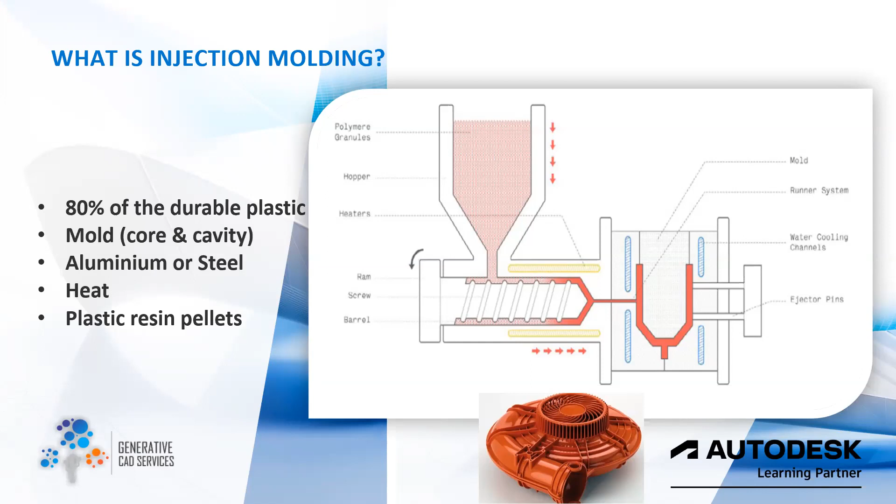The engineers here also know that all of these have their pros and cons, all right? And it has to do a lot with heat and pressures and all this stuff. And of course, for the raw material, we often have varieties of plastics, but they come in resin pellets. So aside from that, it's also very important to mention that there are other plastic forming processes, right? And these all vary depending on the process. So there are a whole couple of them available out there.

But often when you're considering plastic choices or a manufacturing process for plastic, certain things come into consideration, all right? The form, the complexities, the intended volume, and associated cost, of course, production lead time and material. So, given all of this combination, it's always very, very desirable to go for the best fit.

So it doesn't really mean that injection molding is the perfect outlet, but it tends to have the best combination, the best feature fit that favors manufacturing, especially when you're combining volume against cost. So this is something that makes this most desirable. Of course, I've mentioned its share in the market, or its share of the manufacturing process tends to be the best or the most widely used in the industry.

But for me, before we go ahead, people often ask why injection molding. Of course, working at Autodesk, this is partly one of the conversations we often have with people. Why not? Some people even go to the extent of asking why not 3D printing. So depending on the features or the benefits, it's quite important to go for a particular desirable feature. So for injection molding, it's quite favorable. It makes more financial sense when you're going for high volume, when you're mass producing some plastic.

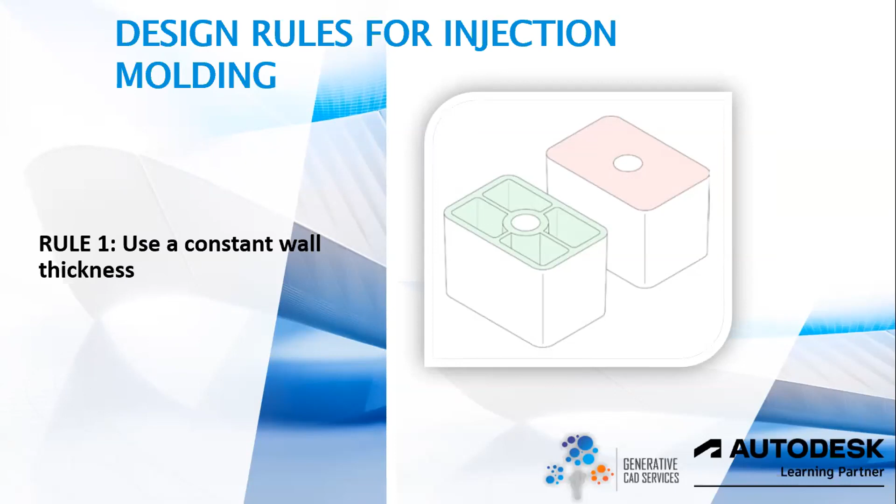And as the time increases, instead of manufacturing 1,000, you're probably going to manufacture 500, and that's a cost on the production. And then you probably literally don't have any use for it. So it's something that I really wanted to cover here.

So the rule is always to keep the edges round, so add fillets, both internal and external. At the same time, the internal edges should be around 0.5 times the wall thickness. So that's the radius for internal edges. And for external edges, you want to look at the internal fillets and the wall thickness.

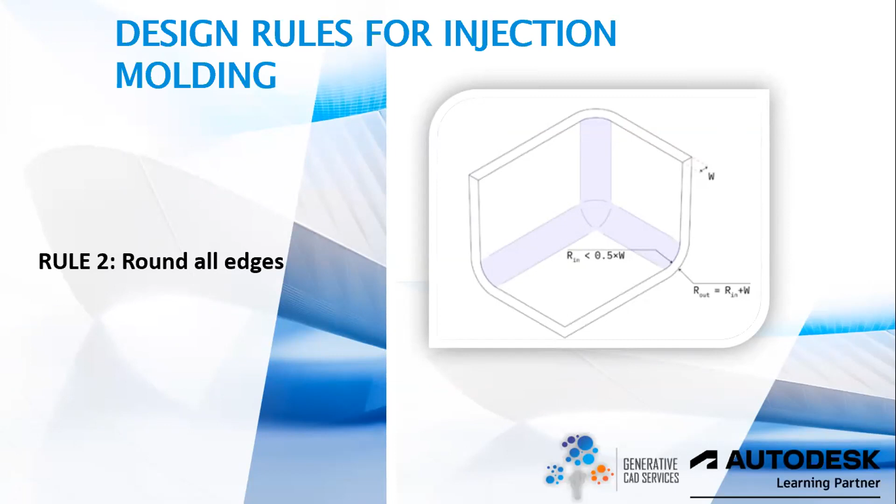So it's always important that you keep the wall thickness constant, just as the edges are also constant, like the fillet and all that. So it should be the same thickness as every other wall part of it. This is something quite important. It's very, very important to note.

And then the third rule is always remember to add draft angles. The recommended minimum draft angle is 2 degrees. So you could make it 2 degrees or 3 or 4, as the case may be. Always add draft angles and don't add less than 2 degrees. It's something quite important.

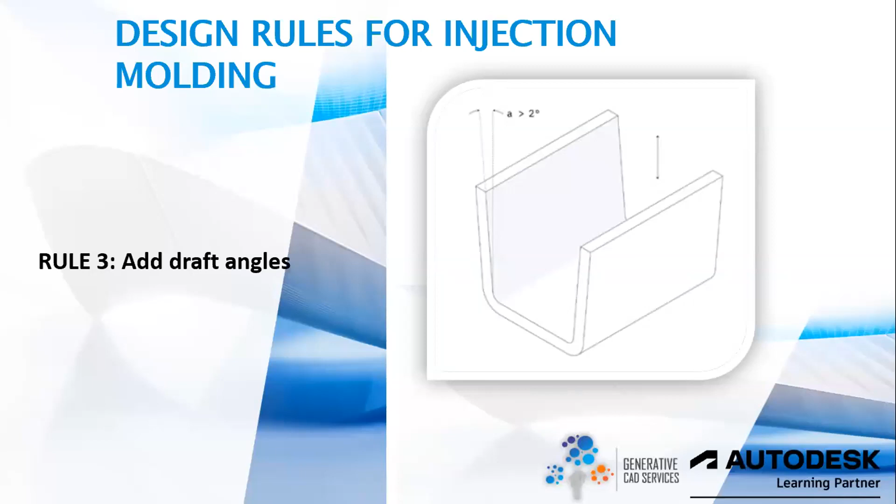Otherwise you probably will have issues during the injection when you inject the plastics and then refill again. If you don't have draft angles, it's actually a problem, which leaves drag marks on the body. So it's always very important to have draft angles, at least minimum 2 degrees. So the next one will be undercuts.

This is a very, very important aspect to consider while designing parts for injection molding. Undercuts in injection molding are part features that are hard to manufacture. The most simple molds come in 2 parts. But when you have an undercut, it becomes more difficult to manufacture with a simple 2-part mold, because material is in the way while the mold opens after injection. So it's always an issue.

One of the things that can cause an undercut is the teeth of a thread, or the hook on a snap fit. These are examples of undercuts, so you can just take note of that. And then how to deal with undercuts: moving the parting line.

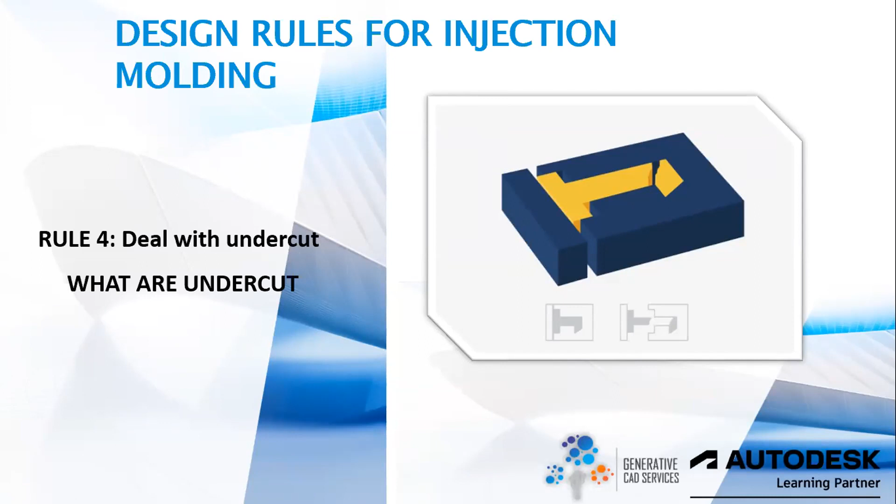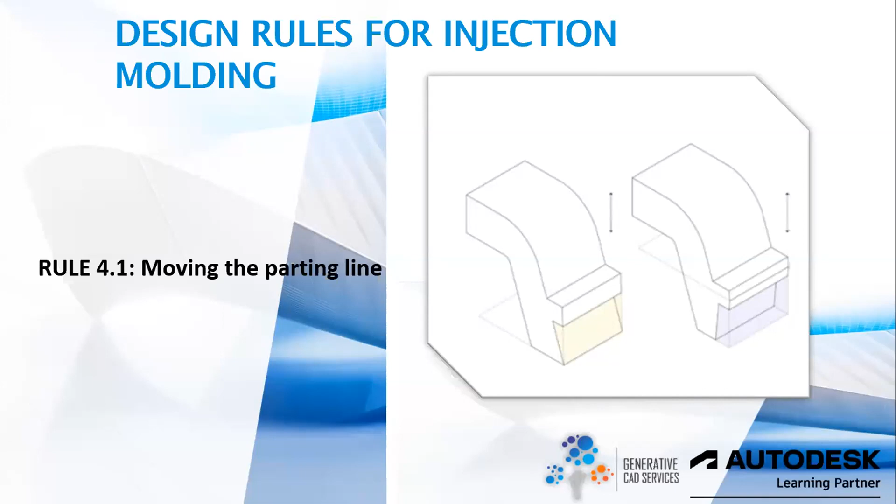One easy way to deal with an undercut, if it works for that product, is to move the parting line of the mold to intersect with that particular part of the undercut. This solution is suitable for many designs with undercuts on external surfaces. Remember, you have to adjust the draft angles accordingly.

The next way to deal with undercuts is using a shutoff. A shutoff removes material from under or above the problematic area. This way the undercut is eliminated, as the whole part can be directly supported by the mold. Shutoffs are a useful trick to deal with undercuts on internal regions of the part for snap fits, or on the sides of parts for holes and handles.

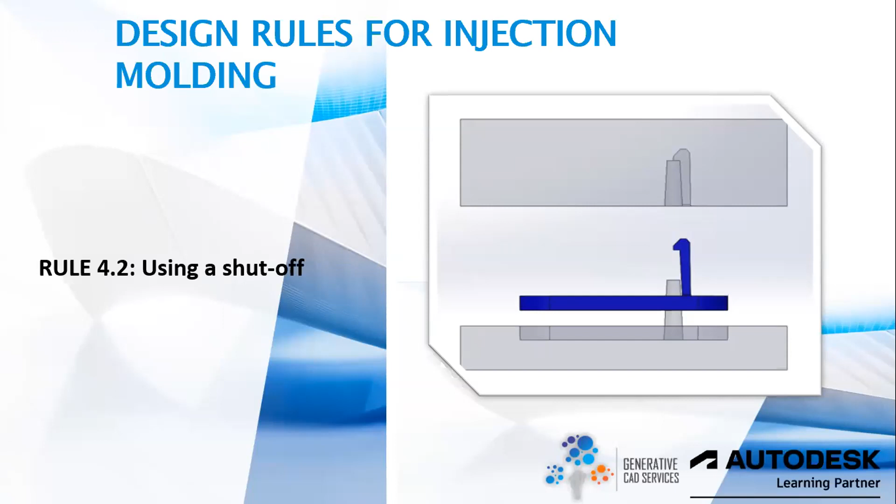The third way we can deal with undercuts is side action cores. This makes for more complex plastic products.

So because of this, we advise that you use this when the two above solutions are not viable or don't give you what you want. Side action cores can be used that slide out of the part from the side before it is ejected. Side action cores should be used sparingly, as they add complexity and increase the overall cost of the mold.

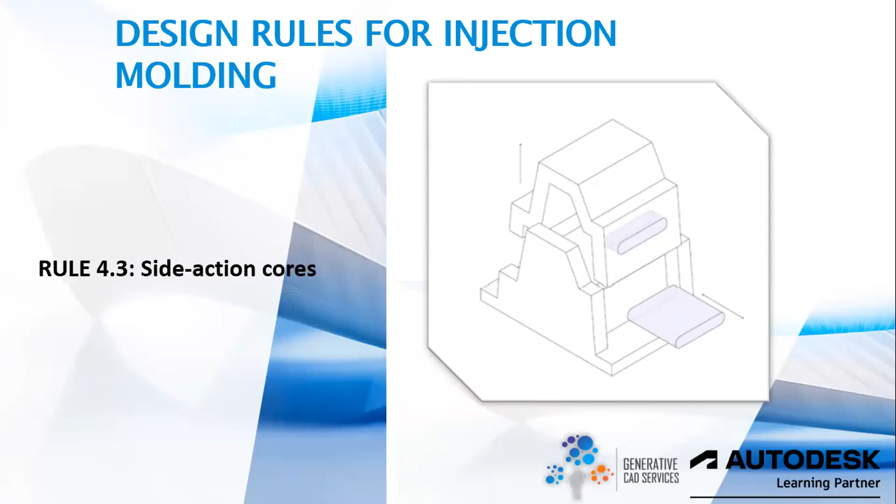It can increase the overall cost of the mold by 15 to 30%, so be mindful that you don't just use it first. You want to explore other options to deal with the undercut before you use side action cores. Next, we'll talk about designing injection molding features.

There are very important features for injection molding that you can always leverage. Like we mentioned, when a wall is more than 3 mm, instead of increasing the thickness, you want to make it hollow and use ribs to hold it. When the maximum recommended thickness is not enough to meet the functional requirement of a part, you can use ribs to improve the stiffness.

When designing ribs, use a thickness equal to 0.5 times the main wall thickness. Then define a height smaller than 3 times the thickness, so it doesn't get tricky. And use a rib base fillet with a radius greater than 1/4 of the rib thickness.

These are some observations, and you also want to add draft angles of at least 0.25 to 0.5 degrees to those ribs. These are some of the things you need to consider. You really need to use ribs, especially when the wall thickness gets more than 3 mm.

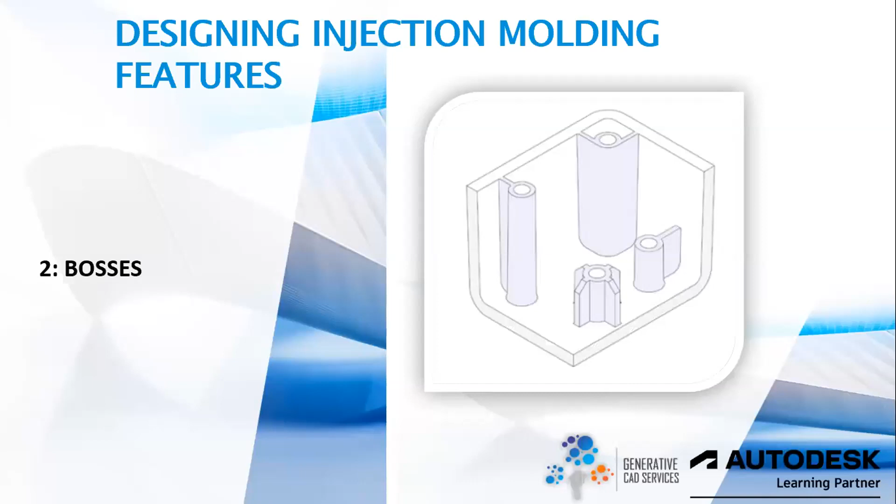The next feature in injection molding is bosses. Bosses are used as points of attachment or fastening in conjunction with self-tapping screws or threaded inserts. Bosses are like circular holes. You can see in the picture they're most times at the edges, or at places where components need to rest, where you use screws. Bosses are like circular ribs, so the same general design guidelines for ribs also apply to bosses.

Next is snap fits. Snap fits are an economical and rapid way of joining two parts without using screws, fasteners and tools. In injection molding, you have to add a draft to the side walls of the snap fit. It's very important, and using a thickness of 0.5 times the wall thickness is also quite important. Adjust the width and length to control the deflection and force. These are things to consider when adding features like snap fits to your plastic products.

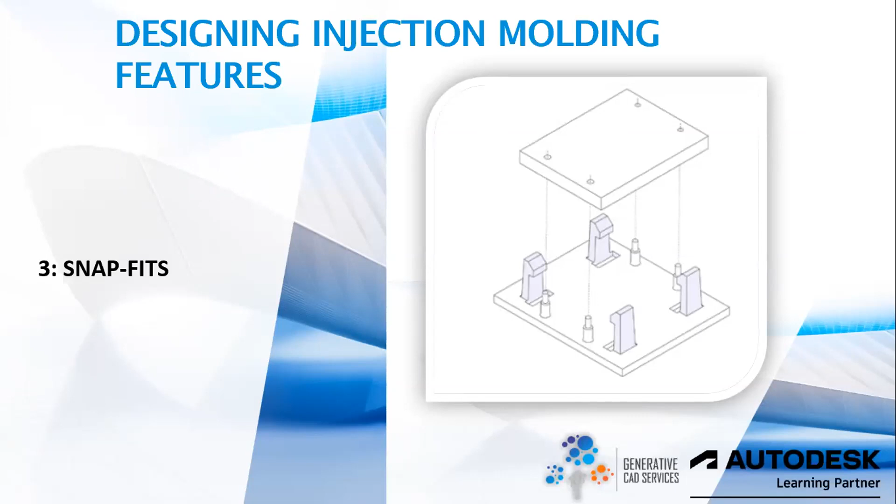Next is lettering and symbols. Most plastics you find have text written on them. Plastic injection molding is great, unlike 3D printing, but it also has rules to get the best results. Text, logos and other symbols can be engraved or embossed on the surface of injection molded parts.

Here are some tips. When adding text, if possible, it is recommended that you use embossing instead of engraving. Align the text perpendicular to the parting line. Use a depth if engraving, or height if embossing, that is greater than 0.5 mm for the text to be clear and not have issues. Use a font with uniform letter thickness all around, and a font size of at least 20.

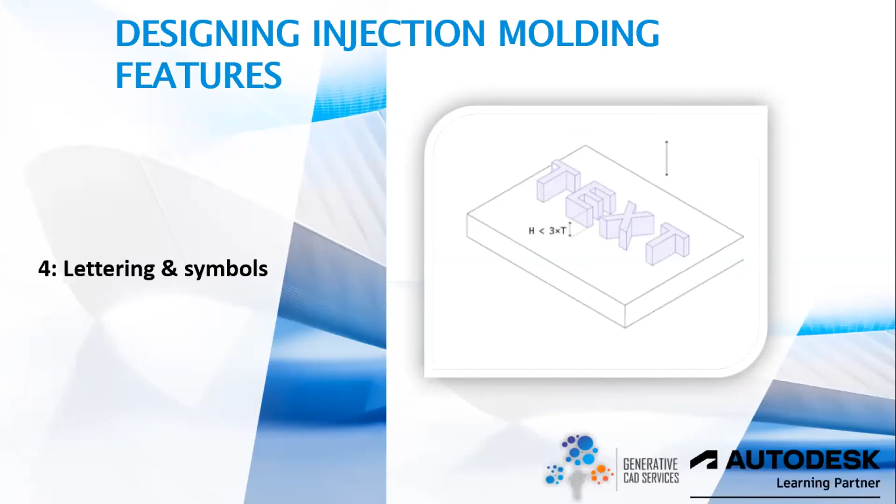So what I just concluded now leads to the part of the case study where we can see how some of these tools and some of these things are applied, and how Fusion really helps us to get this thing done, and gives us further insight and an amazing workflow to solve some of these issues when they arise before sending to the manufacturer. Okay. So, yeah. Okay, thank you so much, Felix.

That's quite an insight, and just to add to what Felix has said, these features, these considerations are quite important for the safety, for the quality and cost of your product. So if you're complying with the required thickness, the required... and of course, if you're preventing undercuts, right?

What people don't often understand is that designing shouldn't be as isolated from manufacturing, because when you keep adding undercuts into your parts, the best solution the manufacturers might be inclined to would be to include mold inserts, and of course that is more money.

So just to continue, Obiora will now give us an actual case study with Fusion 360. He's going to demonstrate how this works, simulating for injection molding. So at the back of our mind, we'll start asking questions like, will the part have sink marks, or are we going to have weld lines that will be detrimental to the aesthetics of the product? Are we going to have problems with excessive warpage? All of these are the questions that this will solve. So please, Obiora, you can share your screen and take us through this demonstration.

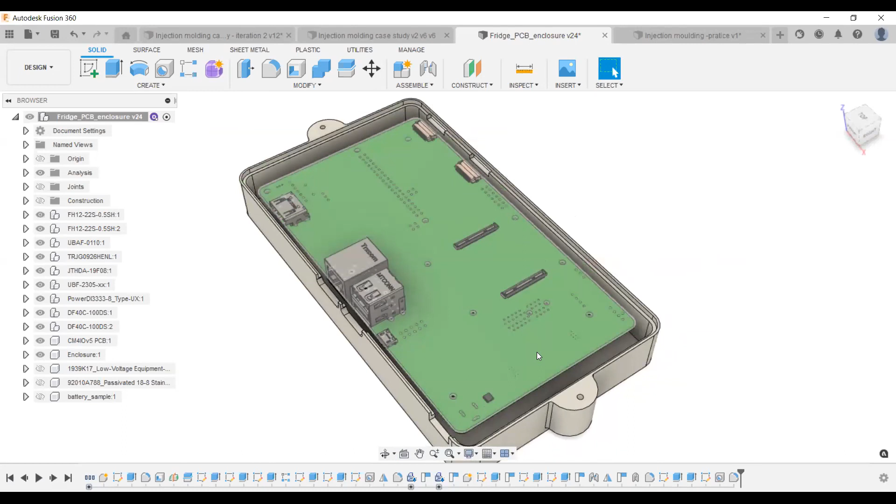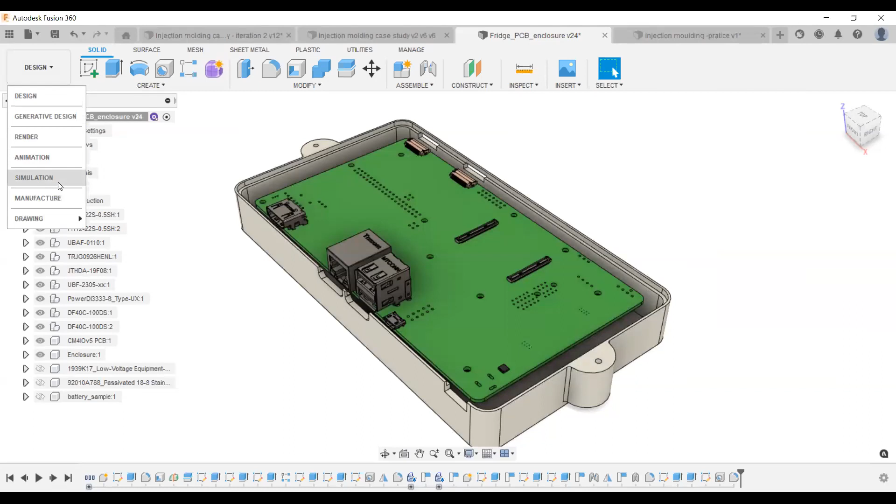But after designing this for 3D printing, you then want to move on to injection molding. One advice I will give is, while designing for 3D printing, you should be thinking at the back of your mind about injection molding. So you should add things like draft angle even in your 3D printed parts, so that you don't start from scratch when you want to go into making tens of thousands of these parts. You should keep to constant wall thickness, even if you are dealing with 3D print. So I'll just jump right into the simulation and show you what happened when we ran the same parts, which were made for 3D printing, for injection molding.

And so say you have an engineer that is well versed in 3D printing and has very fair knowledge of how parts are designed for injection molding. You can just come into the tool, do a few setups, and he has his result right on his screen. And I'll just jump into the results. And don't worry, we are going to be looking at how to do this setup if we have enough time at the end.

And so when I put each of the criteria, Fusion 360 allows you to do things like put the materials. So let me just get out of the result. So first of all, you select the body, you put the type of material you want. There are a whole bunch of materials inside Fusion 360, and probably all the materials you need for injection molding. You set the injection location. You tell Fusion which of the faces is regarded as an aesthetic face, and usually the outer faces are aesthetic faces, and you can see it highlighted in green, right? And so you tell Fusion all of that.

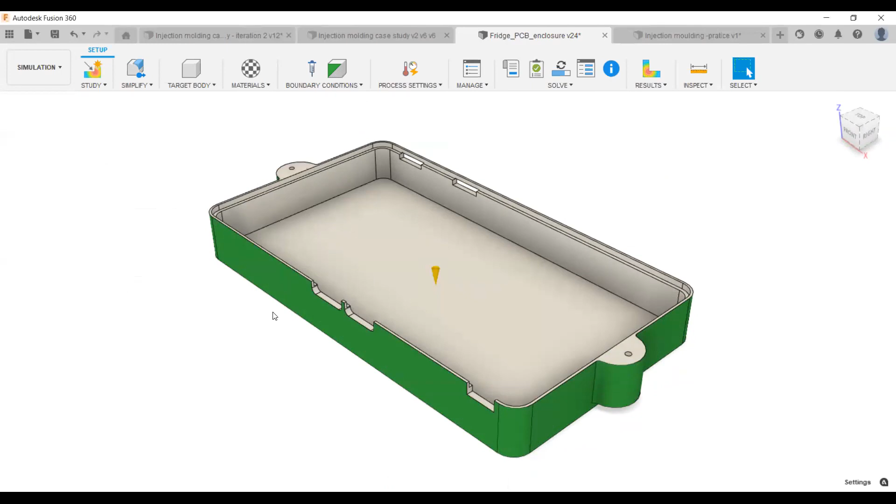And if we jump into the results, so let me jump into the results right now. So after setting all of this, you then send it into the cloud, and Fusion gets back to you. You can see the first information Fusion is giving us. It's telling us that the time to fill will be about 1.72 seconds. It's also saying that with this setting, your part may be difficult to fill with a time to fill of 1.72 seconds. So just 99% of the part is going to be filled up. So we are going to be having issues in some certain areas of this particular part, and I'm going to be showing you that in a bit.

Fusion is also telling us that on 4 faces on our model we have sink marks, and on 10 faces we have weld lines. 4 of these faces are going to be aesthetic faces, and this is actually bad. We don't want to see sink marks on aesthetic faces, and it's also letting us know that our maximum deflection is 0.87 mm, and the total time for this part to come out of the machine is about 17 seconds. We all know how important that is. The lower time your part spends on the injection molding machine, the less you have to pay the manufacturers, right?

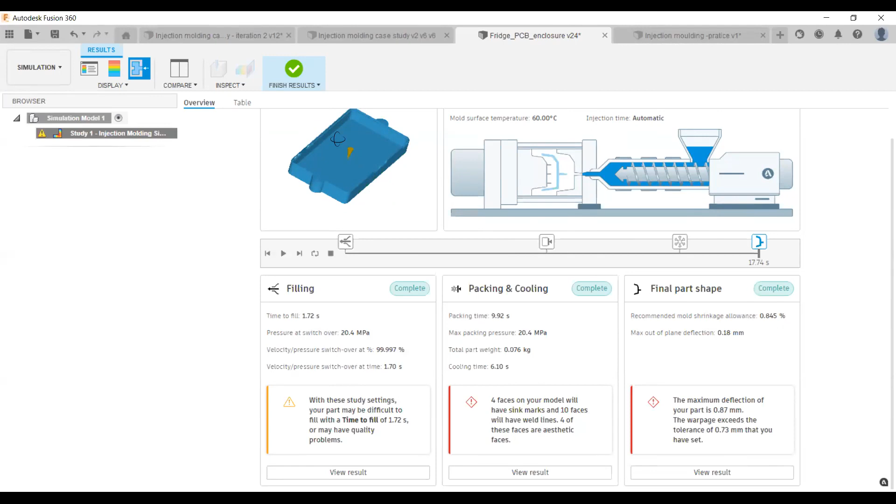And so we're expecting this kind of error because we designed for 3D printing. And then just very early on in the process, we wanted to check what the defects in this part are before we start to redesign for injection molding, although the best workflow would be to always think of injection molding while you are designing for 3D printing. So I'm going out of here and jumping into what happens when we want to design for injection molding. So just give my laptop some minutes. Yep. So we have that.

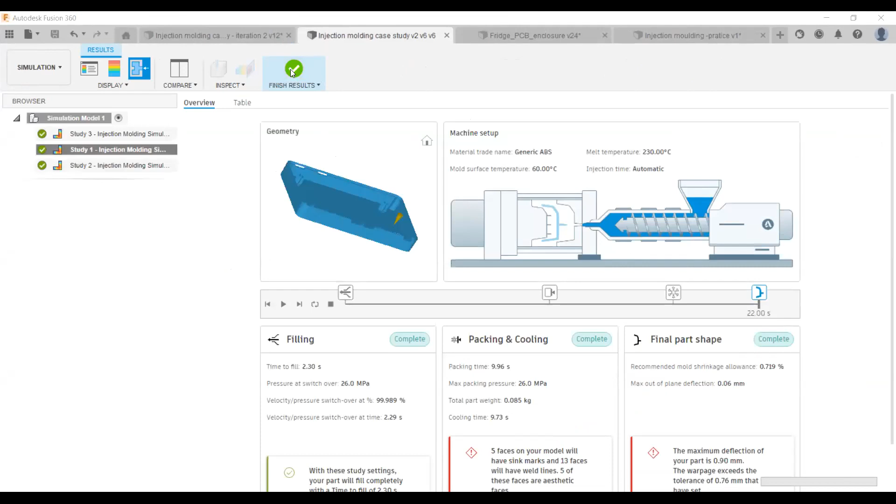So let me just show you some of the features that we incorporated into this part to ensure that it comes out well. So first of all, let me slice this model. If you look at it, there is a draft angle of about 1.5, which is quite recommended for ABS, right? You need to put at least a draft angle, even if it's 0.5. Draft angles help your part to come out of the machine, so you need to put some sort of draft angle so that your part can easily get out of the machine, right?

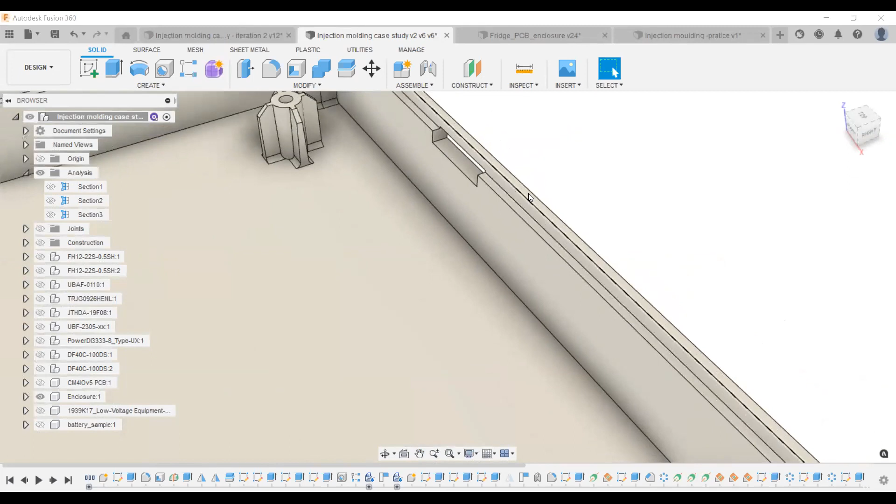So if I go out of here and check, the wall thickness is also quite uniform, right? If I try to measure it, although due to the draft angle it might not be accurate, if I check this face and this face, the wall thickness is about 3 mm. It's because of the draft angle that it's saying 2.998, right? So you want the wall thickness to be quite uniform. And for ABS plastic, you want to stick to 3 mm or just 3 point something mm as the maximum wall thickness, right? So ABS plastic is the material for this product.

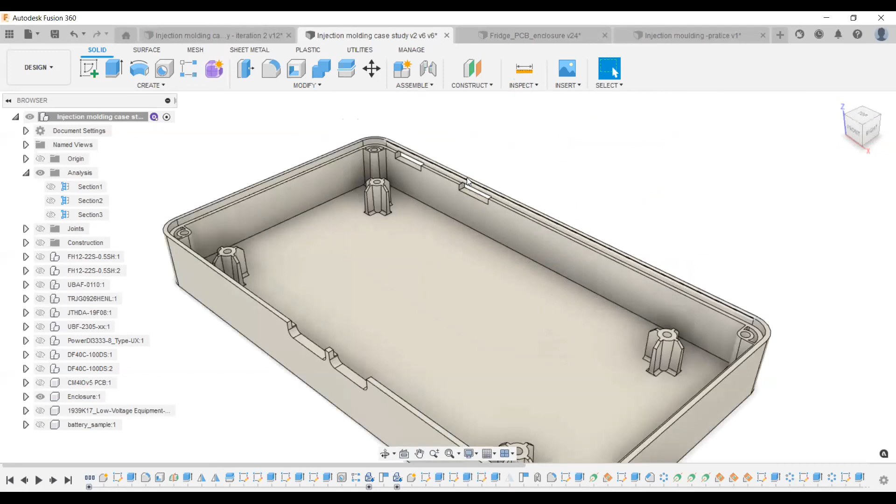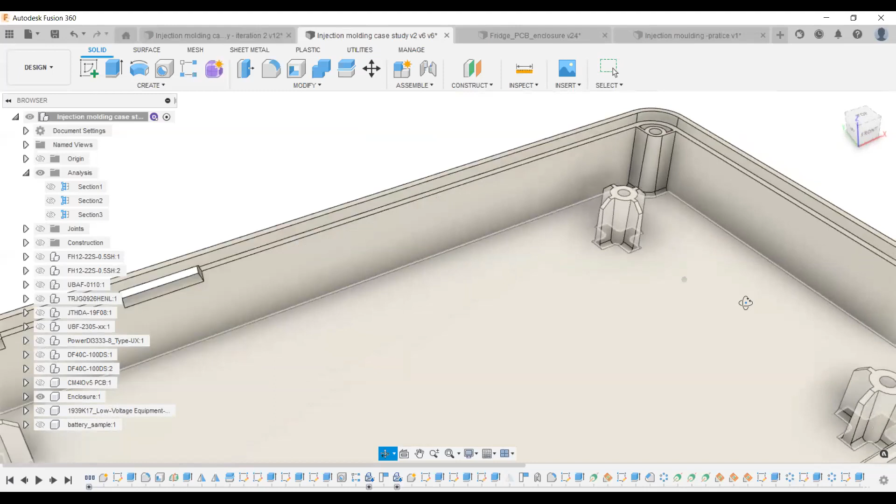And if you also look at this particular product, you can see each of the bosses have ribs attached to them, which is recommended from the information that Felix gave initially. These ribs, called gussets, are all around the boss to ensure that it comes out well, right? If you look at the bosses at the end, they are supported with ribs, just to keep to the rules of injection molding, so we don't have too many defects when we send this part to the manufacturer.

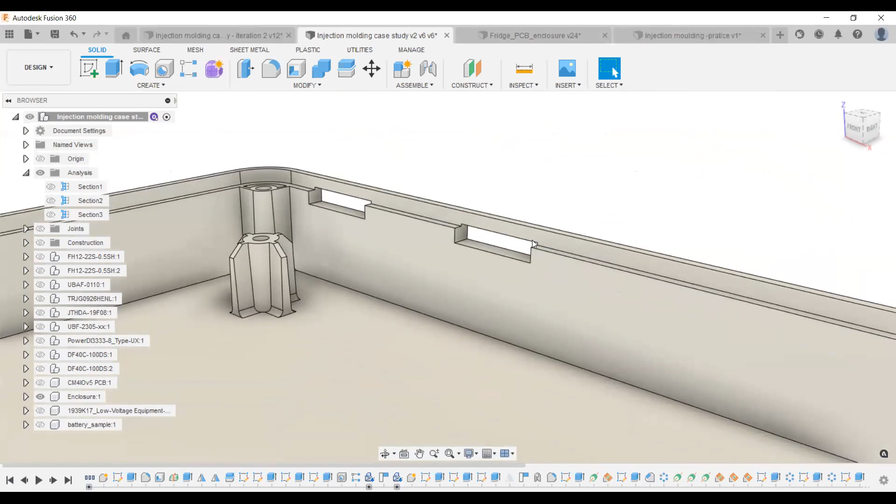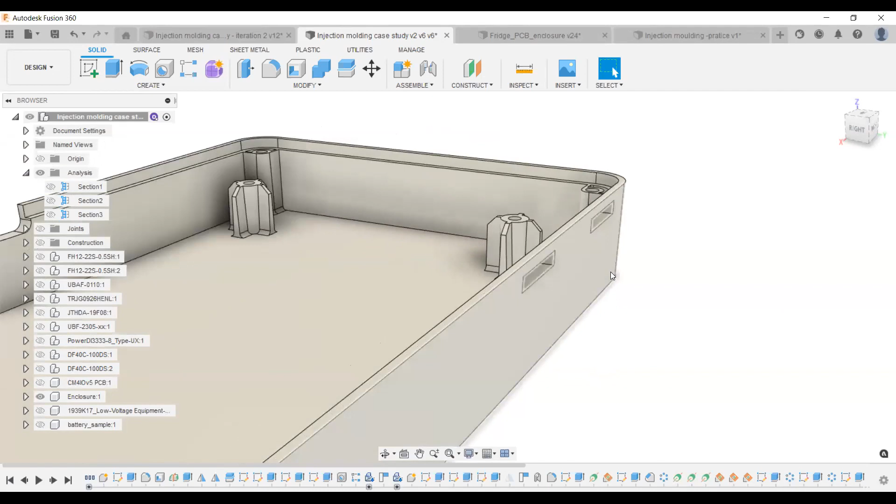But just at this end, if we look at this end, we can see that there is a possibility for undercut, right? So depending on where you put the parting line, this particular slot or this particular cutout can be a big area where undercut might be an issue. And what will happen is that the manufacturer will tell you that you should use a side action, right? Something that you can put into the mold to prevent the material from filling up this space. So these are some of the things you have to start looking at when you're designing for injection molding.

And if we jump into the simulation, again, I will show you before the end of this presentation how to go about setting up this simulation just very quickly, not so much into details, but that you can use to get started with. So I'll then jump into the results. And let's probe and see what Fusion told us about this particular part that we designed for injection molding. So let's just give it a minute to come up, and yeah, this is it.

So the first information that Fusion is giving us is that with these settings, our part will fill completely with a time to fill of 2.3 seconds, right? But from the former one, which was the one for 3D printing, the part at this right end was finding issues filling up. But when we redesign, keep to constant wall thickness and follow all the rules, Fusion is letting us know that our part is going to fill well. It's then telling us that 5 of these faces are going to be aesthetic faces. The part material is still ABS, right?

And if we say we should probe more, let's look at other displays. Initially, I was on this particular display, the molding process, which shows us at a glance, right, what kind of defect we are going to be having. And if you look at the total time, it's 22 seconds here. It has increased from 17 seconds to a whopping 22 seconds. And that's a lot of money.

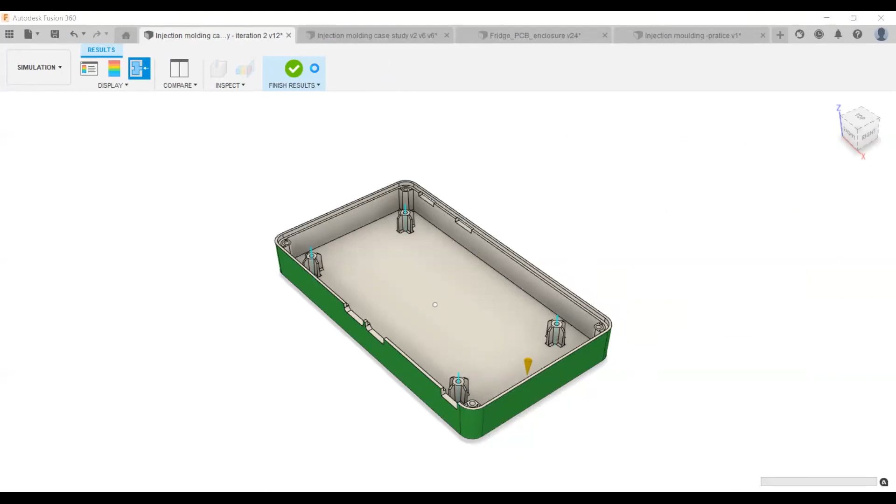Oh, sorry about that. Just give me a minute. So I mistakenly clicked the tab I'm not supposed to click. So let's get back to the study that we were looking at before. Injection molding case study. Yeah, so we are right.

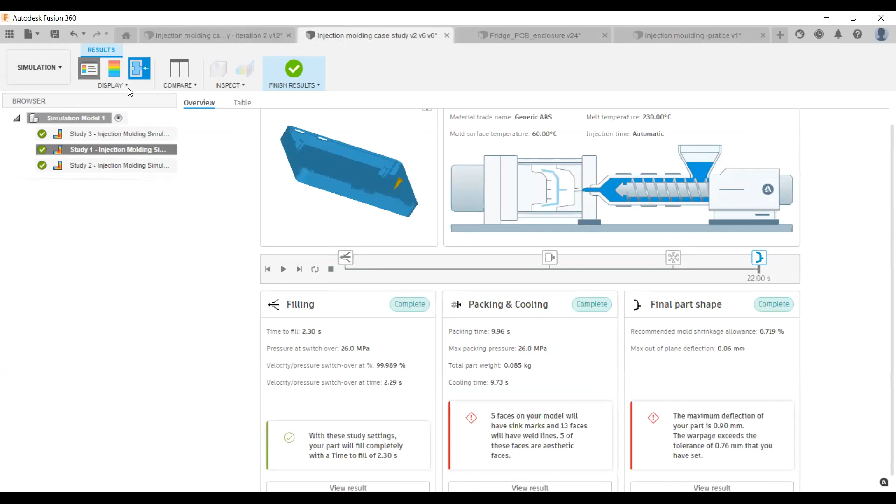So then let's look at other display settings. So if you can see where my mouse is under display, I'm going to be looking at the first one, so we can probe this more in depth. Right. So the first one is that our part is filling well, although the time has increased to 2 seconds, but it's filling up properly because we've kept to rules. We've started to use ribs at the different bosses, and we've ensured that the wall thickness is uniform. We've also added some draft angles, right?

And so if we go to the next tab, which is the visual defects, Fusion is still telling us that 5 of these faces are aesthetic faces. They were going to be having sink marks and all of that. So this is very useful information. If you look at the first presentation that Julian gave, it takes about 8 to 12 weeks lead time for your part to come out. So actually that's about 2 months before you get your parts in your hands from the manufacturers.

And imagine you have to go back and forth with all of these design changes. The manufacturer is coming back to tell you via email that look, you have to accept this recommendation, and you have to go back to your team, sit down in a meeting and do all of this. But with Fusion, your designer gets to see it right off the bat on their screen, and then they design and see these suggestions right here.

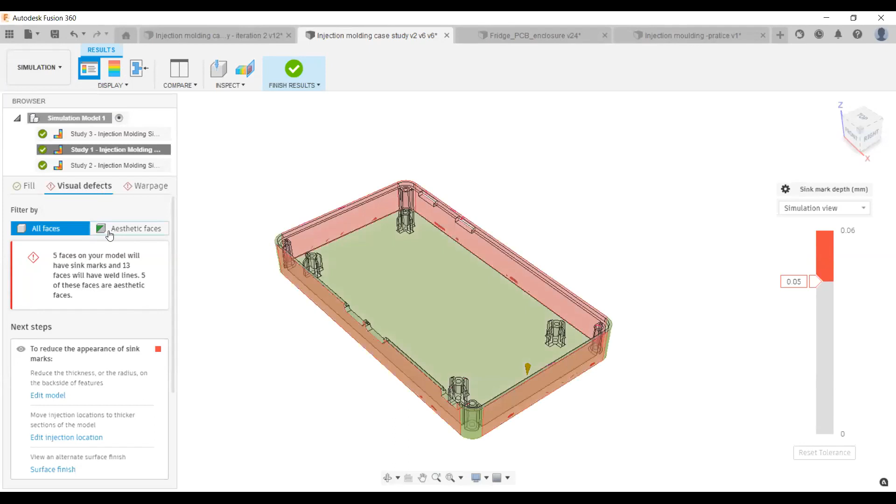Now, we can then go deeper and look at these aesthetic faces, and we can zoom in the screen, right? And we can rotate our screen, and we can see that in different places we are having sink marks, which is bad, right? We are having different kinds of sink marks, and Fusion doesn't just show us the issues we are having.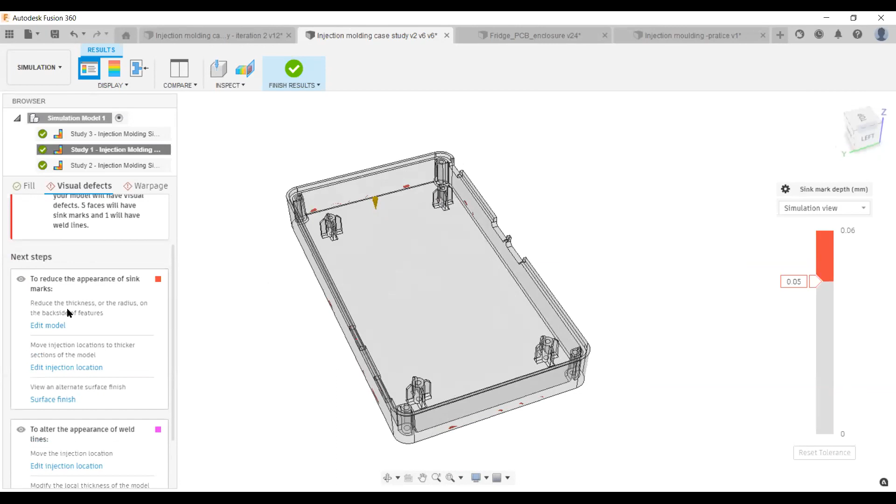It's telling us that we need to reduce the thickness or the radius on the back side of features, right? So we used a 3 mm thickness initially, and it's telling us that we need to reduce these thicknesses. Probably we need to move the injection location to thicker sections of the model, right? So Fusion is also telling us to move the injection location and modify the thickness.

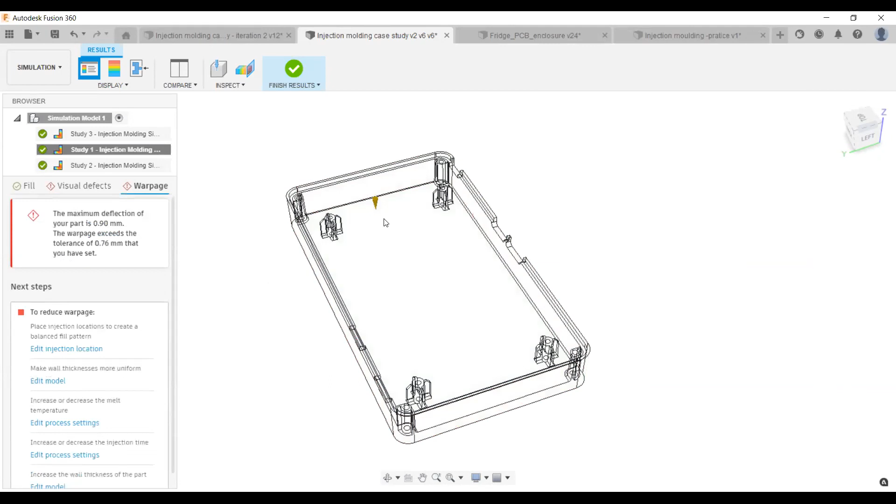If we have more than one injection location, probably we need to reduce that. And if we jump into the warpage, we can see more results. And if we look at this more in depth, we can see that some section of our part is warping. So let me look at the front view. And if we zoom in, we can see that while this part tries to cool and solidify, it shrinks in, it warps. And so there's a warpage.

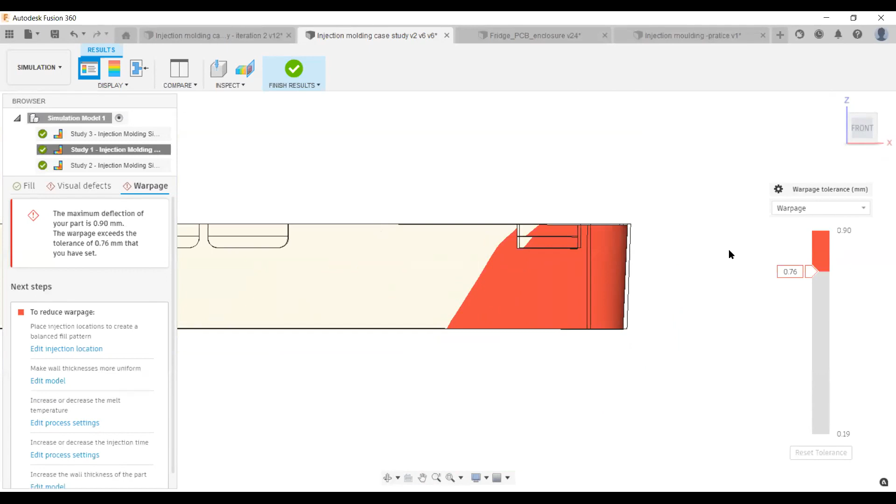And Fusion also gives us a warpage tolerance. So if you are new to injection molding, or if you don't have all the industry standards, Fusion can tell you that for this particular plastic, the warpage tolerance that is generally accepted is 0.76, right? And your part is currently exceeding that warpage tolerance. Do you want to move on to manufacture this part or not? And that's up to you.

You can do a lot of tweaks, which I'll be showing you in the next iteration, to reduce this warpage that's happening to your parts, right? And so we can also compare between studies. If we click on this compare button, we can compare between different studies. We can start probing. If we click on this surface probe, we can click somewhere here, and we can see the warpage that this particular surface is undergoing, and it says 0.78 mm, right?

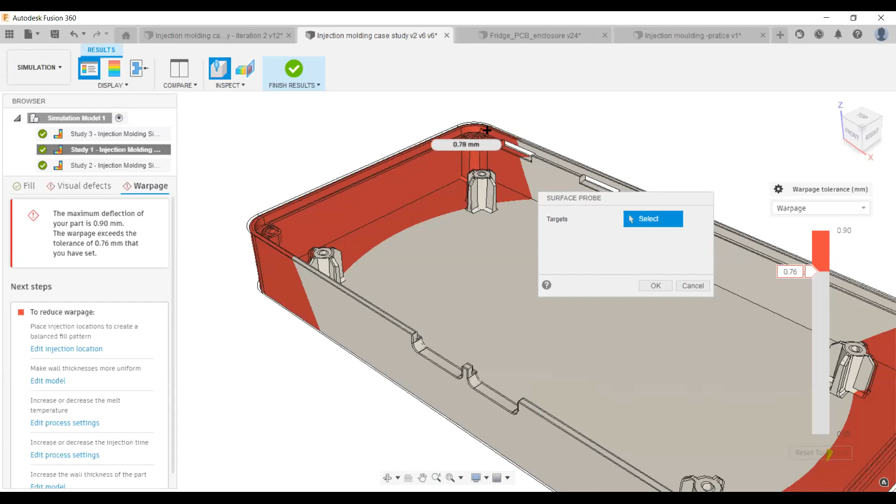So this particular surface is actually below, but at this end, we can see that the warpage is actually increasing, and this is where the warpage is actually highest, which is 0.90 mm. We can begin to probe and see places that we can reinforce with ribs and the rest of that. Right, so I will just go into the results. So there's another display called results.

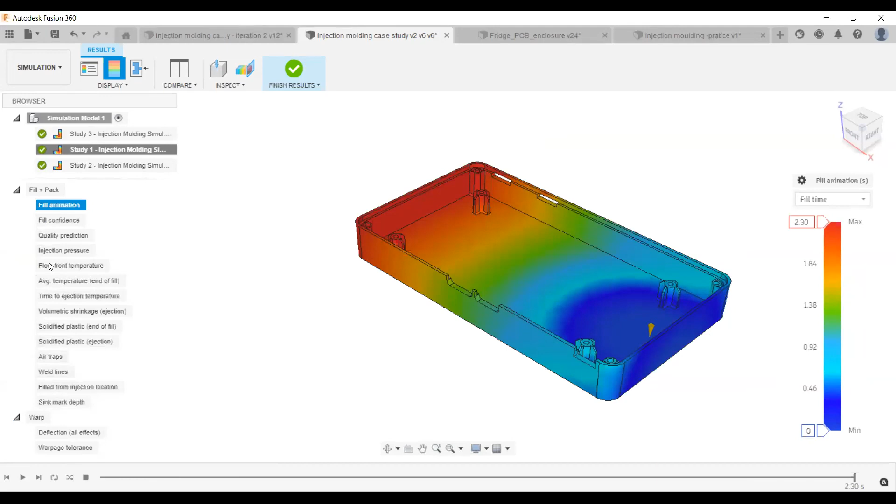And what results does is that you can see a lot of settings: fill animation, fill confidence, quality prediction, injection pressure, flow front temperature. People that are very used to injection molding know how important all these settings are. And if you look at the fill animation, if you just click play, Fusion can show us exactly how this part is going to fill up. If there's any issue, we'll see right here where the issue is coming from, and we can see that the part fills up exactly how it's shown in the animation, right?

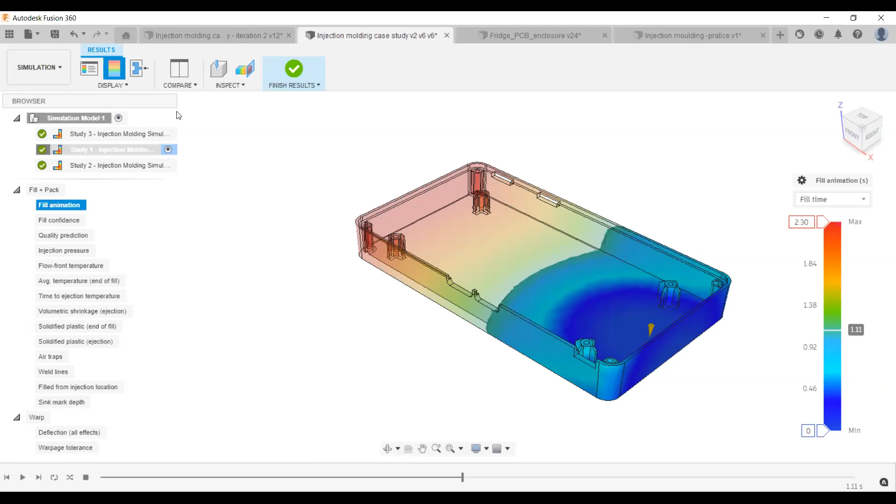So this can give you, the engineer, a lot of insight. Where should I put the injection location, what can I change and the rest of that. So I'll just click on finish results so we can jump into the final iteration and discuss more on that. So let's give Fusion a minute to set things up.

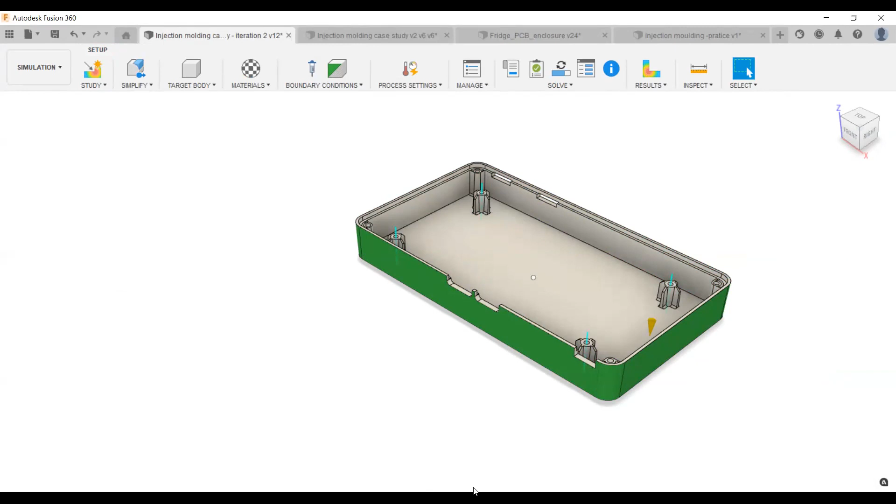Yes, so we are here now. All right, so first of all, let's go into the actual design and do some discussions. So if you remember, at this side we had some material going this way, and like I said, this material or that particular space can present a lot of problems for undercut, right?

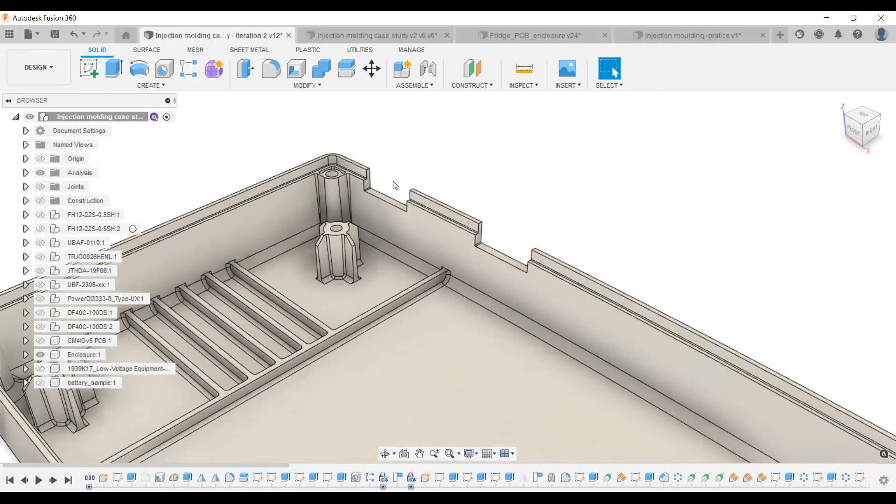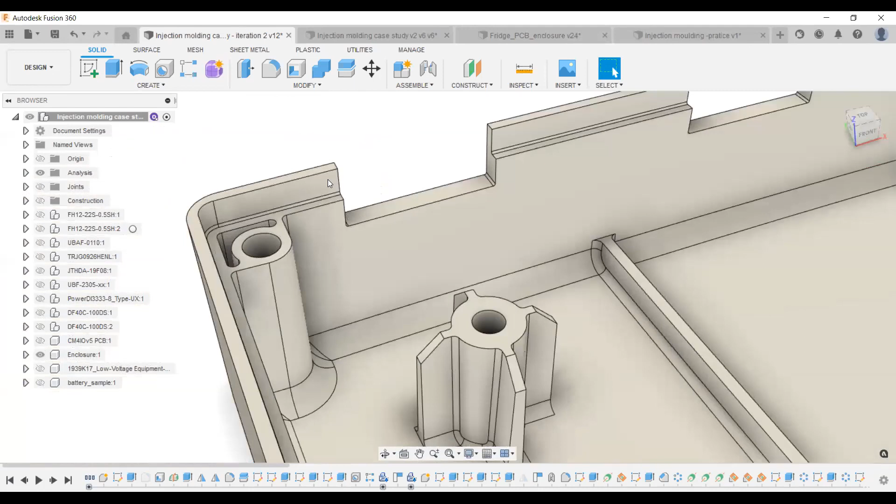And the best solution, if you are looking at the part and how everything is being assembled, is just to remove that piece of material and ensure that you can use a two-sided mold, right? A very simple mold that just comes in and helps you. And this is actually quite cheaper than using a side action. You have to machine this mold, and the more time you spend machining this mold, it's a lot of money. And so the best solution to deal with this particular undercut was just to remove that material over there. First of all, it helps your part to fill up nicely and it saves you a whole lot of money.

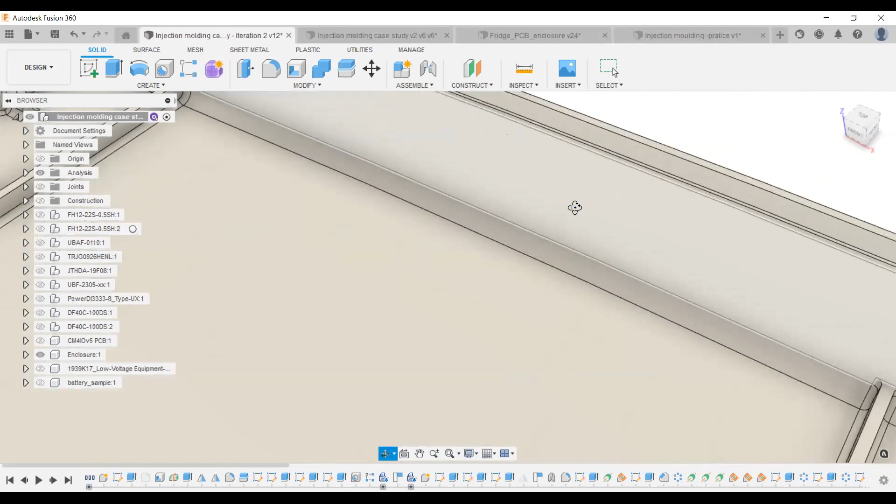Secondly, because of warpage and issues of sink marks and the rest of them, we want to add ribs to certain locations of the part, right? We also want to make sure of areas where the thicknesses are not uniform. So we can see that this thickness is different from the overall thickness of the part. We want to ensure that we add a very smooth transition, and also we've reduced the thickness from 3 mm to 2 mm, right?

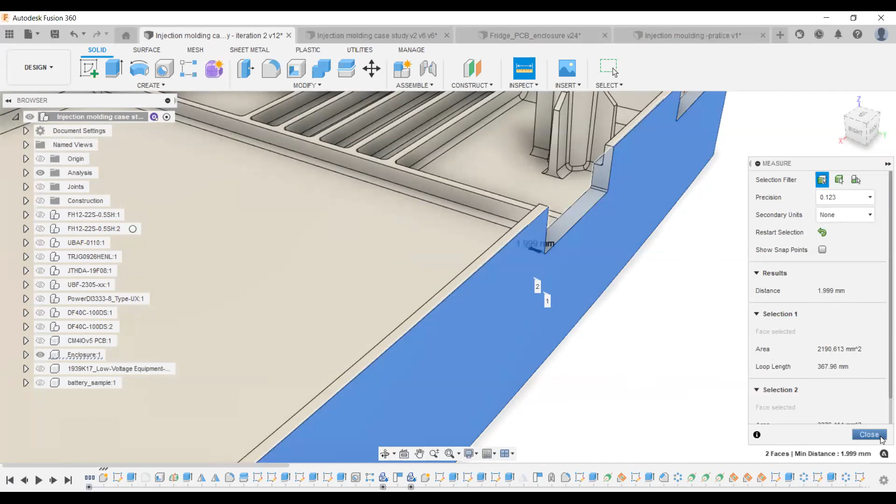So we want to make sure that we take down the time the part spends on the machine. Remember that the former one was 22 seconds. We are going to be seeing what the time is telling us here, right? So we want to make sure that the time the product spends on the machine is at a minimum. And if we can reduce the thickness as low as possible so that it does not affect functionality, that would actually be great.

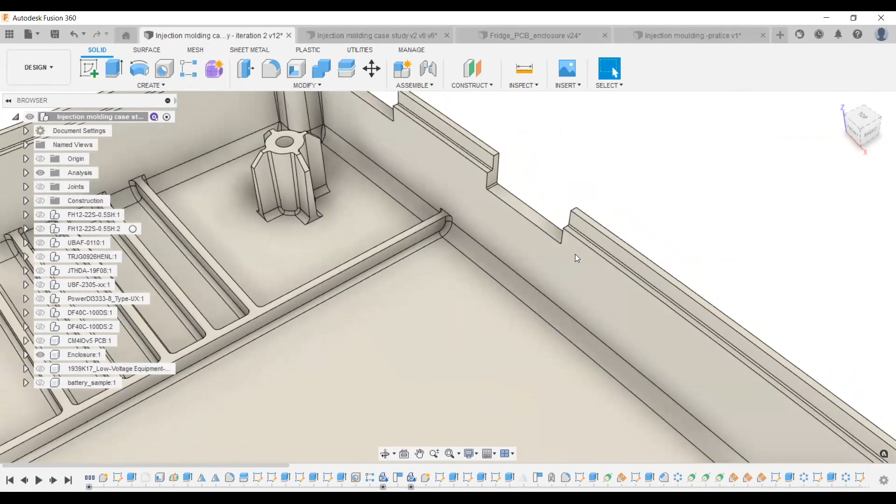And in this case, we can take it down to 2 mm without affecting the functionality of the part, right? We want to also make sure that we add smooth transitions to places where the thicknesses are not so uniform. And to all our ribs, we want to ensure that we have fillets in those areas. Again, we want to make sure that we have draft angles added to our parts, right?

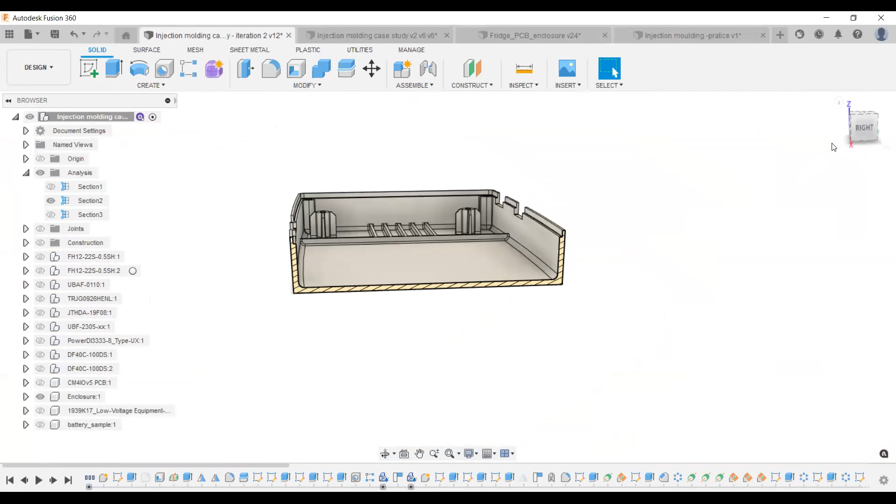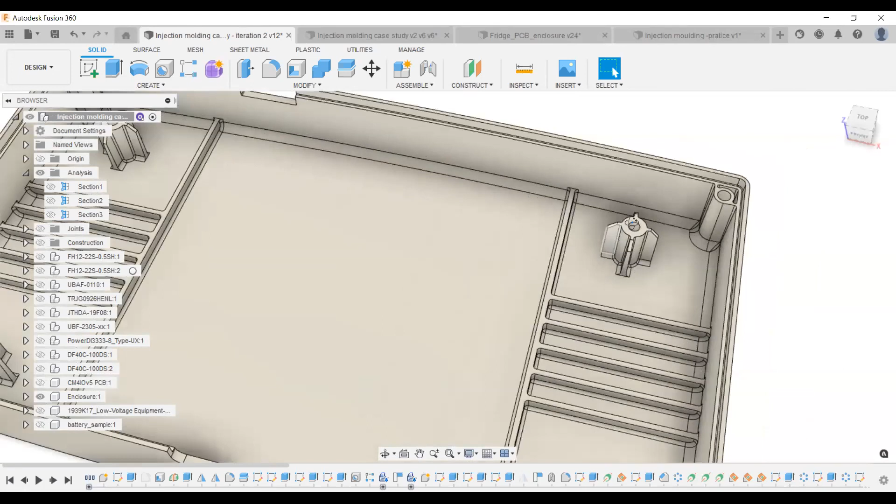And if you look at this particular part also, it's not perfectly rectangular, because rectangular enclosures are more prone to warping. It has some kind of curve just to ensure that we deal with the warpage issues and the rest of that. Again, our bosses have ribs, right? Keeping to the injection molding rules. So I'll just jump very quickly into the simulation and let's see what Fusion gave us in that case.

Yeah, so I hope you can all see my screen and you can hear me loud and clear. Yes, Obiora, please go ahead.

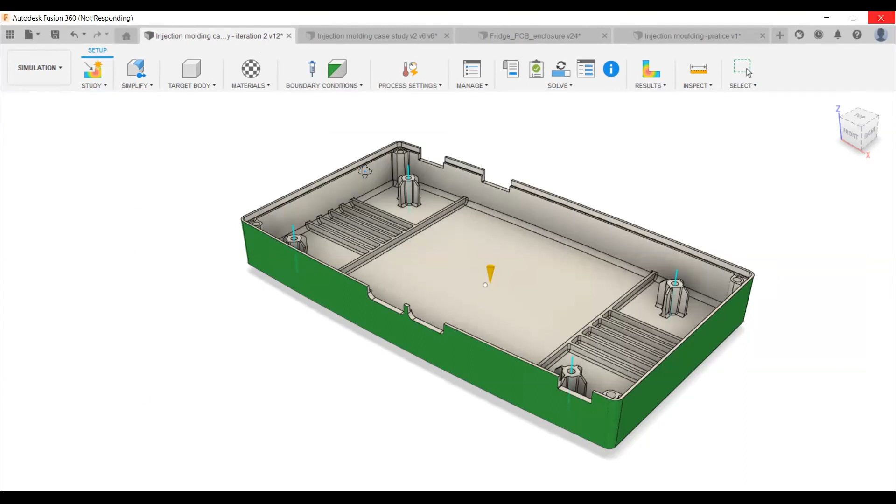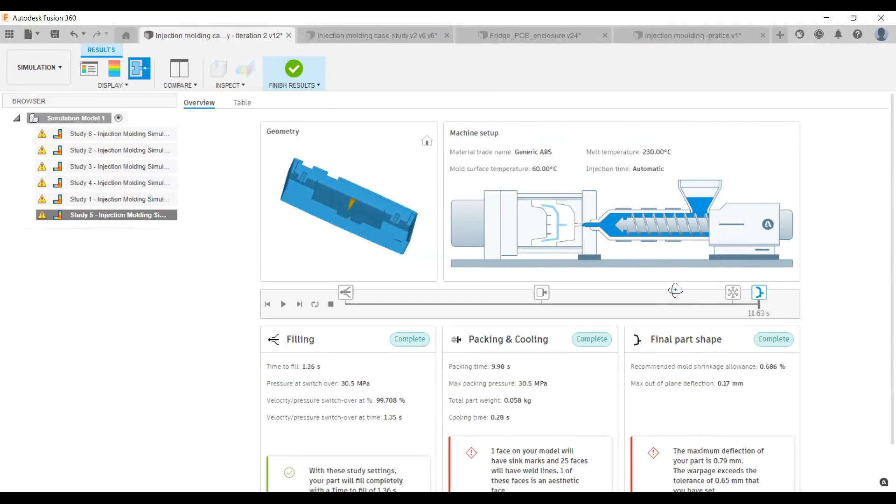Yes, so this is the result. Let's first of all look at the usual setting we look at first, on the display, the last one. First, Fusion is telling us that it will take 1.36 seconds to fill compared to the 2.2 seconds that we saw in the initial study. And the overall time is 11.63 seconds. Remember that this is still ABS plastic, right? The former one showed us 22 seconds. So that's like half the time. By reducing the thickness, we're able to take it down by 50%, right?

And Fusion rightly told us that we should reduce the thickness of our parts to deal with some issues. And it's showing us that this will take about 11 seconds, which saves your company a lot of money. We can also see that it's saying one face on your model has sink marks, 25 faces have weld lines, right? One of these faces is an aesthetic face. Previously we saw that about 4 to 5 aesthetic faces would have these sink marks and weld lines. But now, by following the different recommendations that Fusion gave us, we're able to reduce this to about one of these faces having these defects, which is great, right?

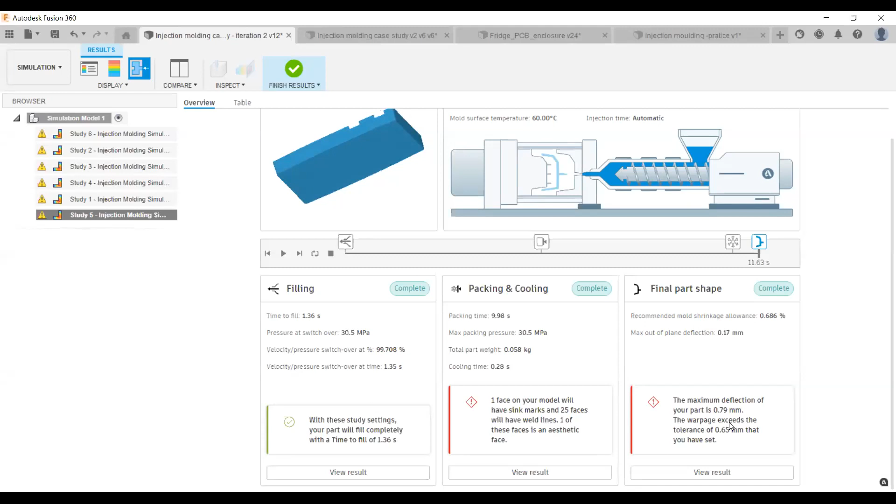And so this is how far we can go with the software before we send it to the manufacturer. We can play with a lot of process settings, and the manufacturer can come back with just 1 to 2 recommendations instead of a whole bunch of recommendations about your parts. And we can also see that we've taken down the deflection to 0.79, getting very close to our tolerance of 0.65. Initially, it was 0.89, right? So let me jump into the guided results, just for us to see how things are.

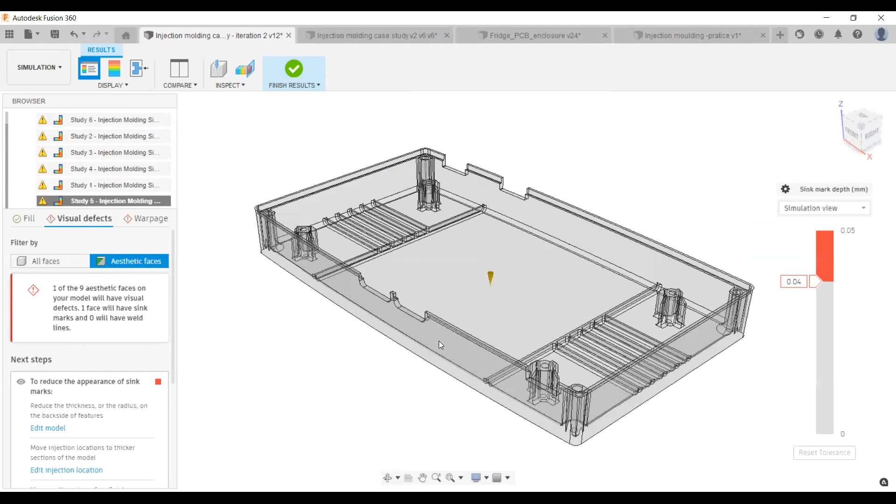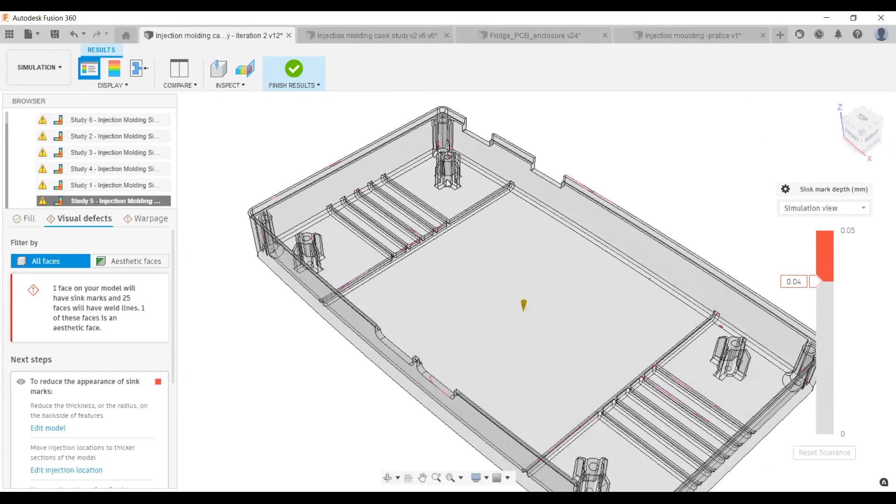Now, if we move into the visuals and look at the aesthetic faces... let's wait for Fusion to set things up. Let the simulation view come up. Right. So if we look at the part, previously there were a lot of red faces, a whole lot of red marks everywhere. We could see very large sink marks in every section of the part. But by reducing the thickness and adding ribs to certain locations, we've been able to remove a whole lot of sink marks.

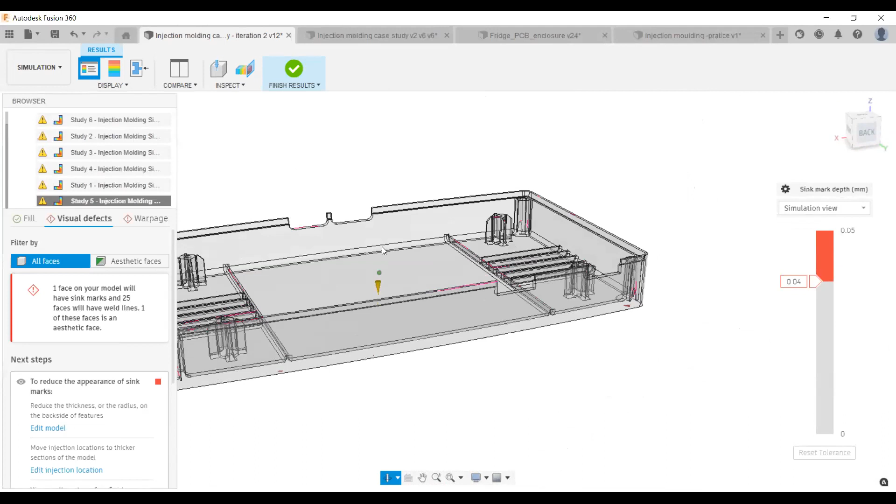And the only sink mark, like how Fusion rightly pointed out, is just at this bottom region. And probably we have to add a very generous fillet to this side of the part to reduce that particular sink mark, right? And Fusion is also showing us that we are going to be having weld lines in some of these ribs, and with these settings now, or with this recommendation, we can then go to the manufacturer, and the manufacturer can tell us 1 to 2 things for us to do, and boom, we are already putting our part in record time.

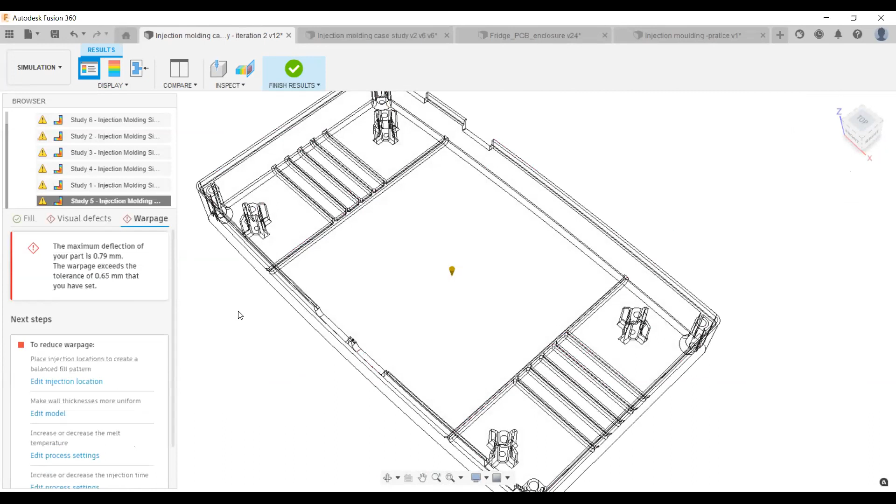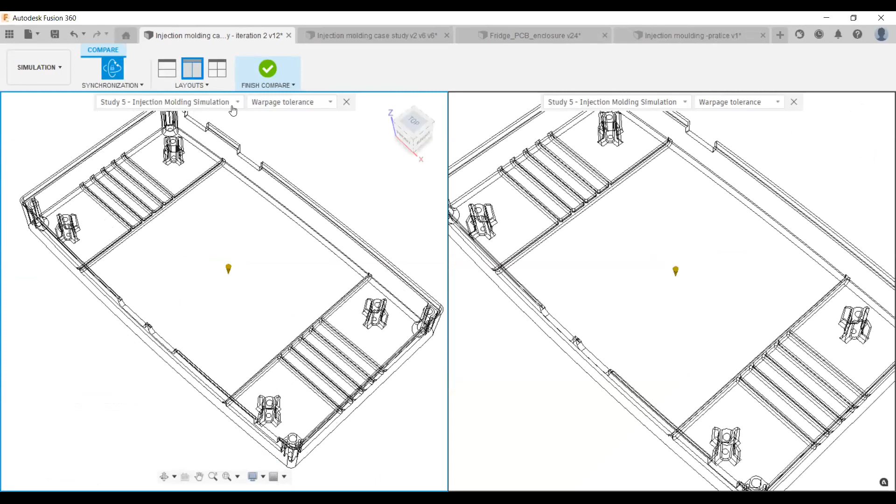Right, so if we jump into the warpage, similar thing, we've been able to take down the warping to a 0.79 compared to when we're seeing warpage of 0.8, 0.89 at certain locations of the parts, right? And like I said before, if we click on compare, we can compare between two settings. Remember, we have different studies. We have study 1. So if you look at study 1, we can compare study 1 with what's happening in study 5. And we can look at them on the same screen, but on different tabs. We can look at 4 different views. So we can compare 4 studies at a time.

And we can, from our screen, start to make different design changes. And we can say, okay, let's go with ABS plastic instead of another material that we picked. Probably this injection location that is at this end is not giving us favorable results compared to the injection location at the center. So these are some insights you can get by using Fusion 360 injection molding simulation tool, right?

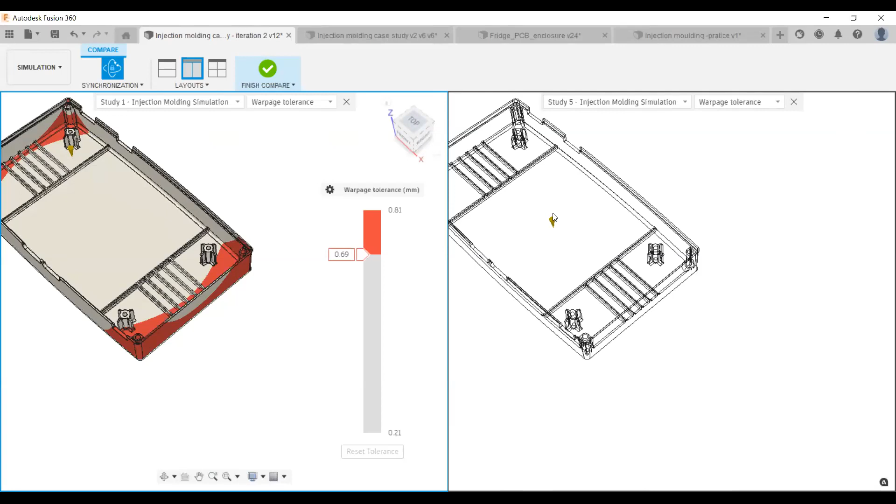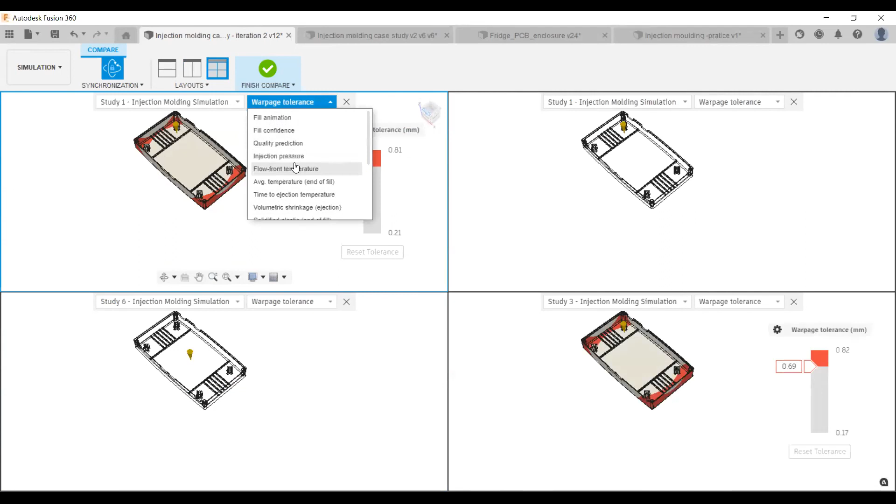And so I'll just show you how to look at the 4 grids. So we can change it from study 1 to study 6. We can change it to study 3. We can start to change the different settings to fill animation, fill confidence, and all those different settings that we use when we do injection molding. And the good thing is that we can do this very early on in the process. Like we can do this when we are designing.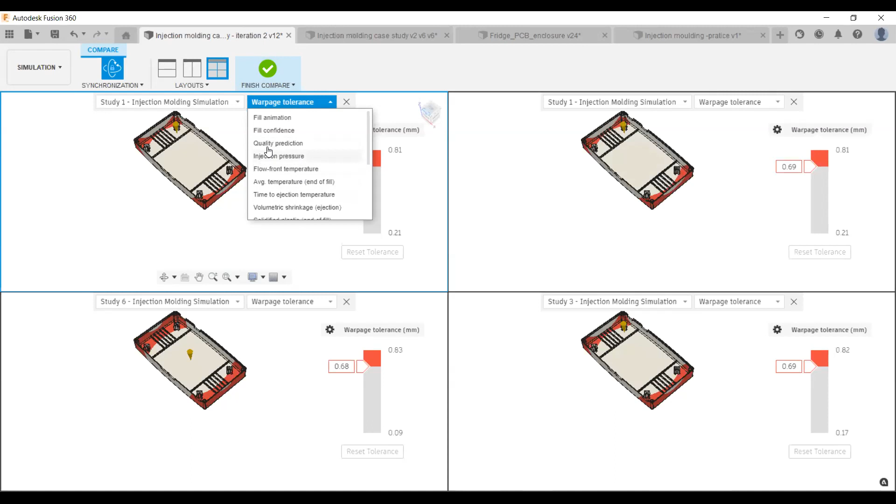We can check all of this, and we don't need to go out of this software. We don't need to export our file to a STEP file, taking it to that simulation environment. We can do all of this in a single software. We can collaborate with different team members. The design engineer can be working. The person that is an expert in plastic injection molding can also be working. Everything in one software, and everybody using the same file at the same time. Right, so I'm just going to click on finish compare, right?

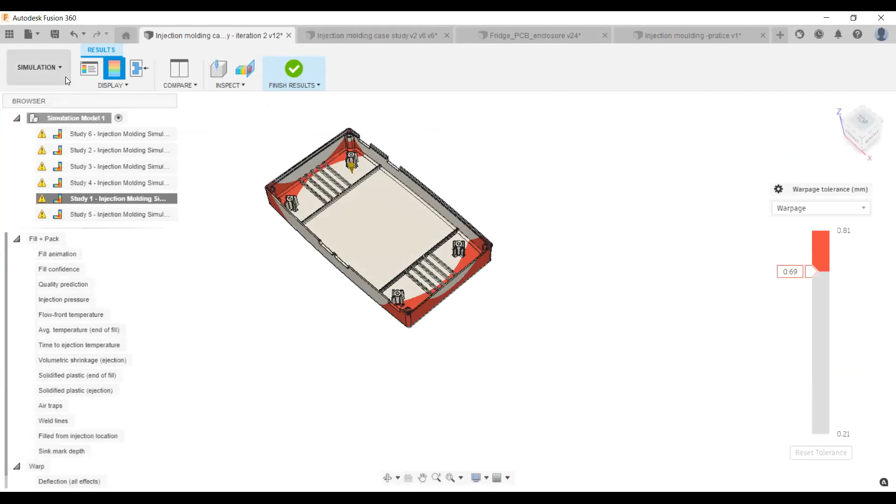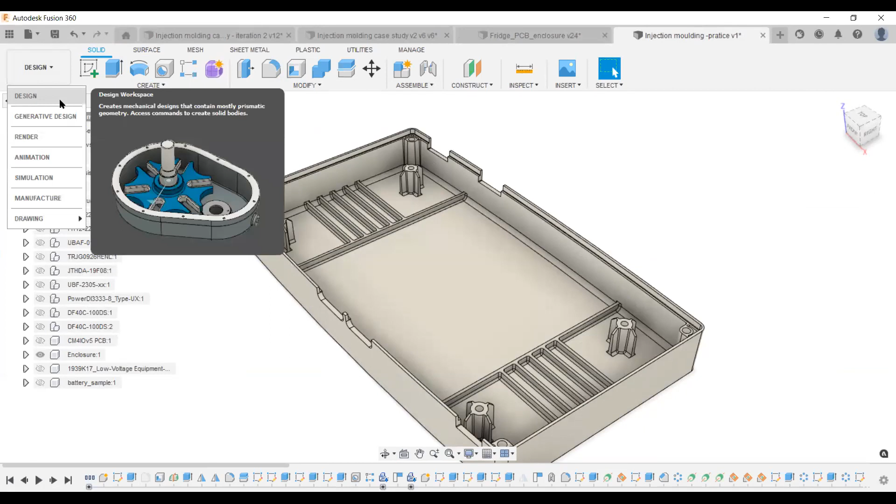And now for the last part, I'm going to walk you through how you yourself and your team can leverage Fusion 360 to set this up very quickly. Right, so the first thing you want to do, of course, is do the CAD modeling, ensure that you have everything set up inside the design environment, and then you want to jump into simulation. So when you go into simulation, Fusion brings this tab up for you, right? Previously, the injection molding simulation was on preview, but right now it's currently among the studies, and we can then click on injection molding simulation.

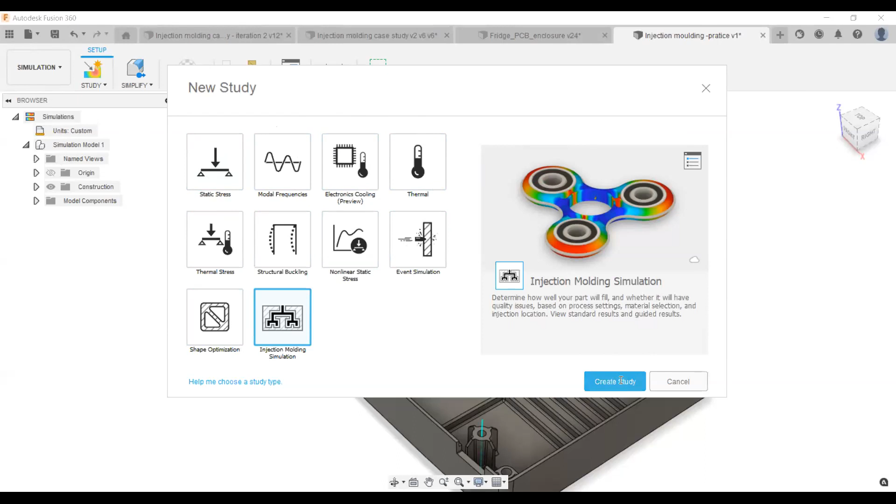And just as a side note, Fusion does other types of simulation: static stress, modal frequency, electronic cooling. So if you finish your electronic part right up here, you can take that product, and you can check if everything is fine with it. We have thermal, we have event simulation, shape optimization, and there's a study called generative design if you want to explore that. So I'm just going to click on create study. So let's all take a step back, and we can see the thing.

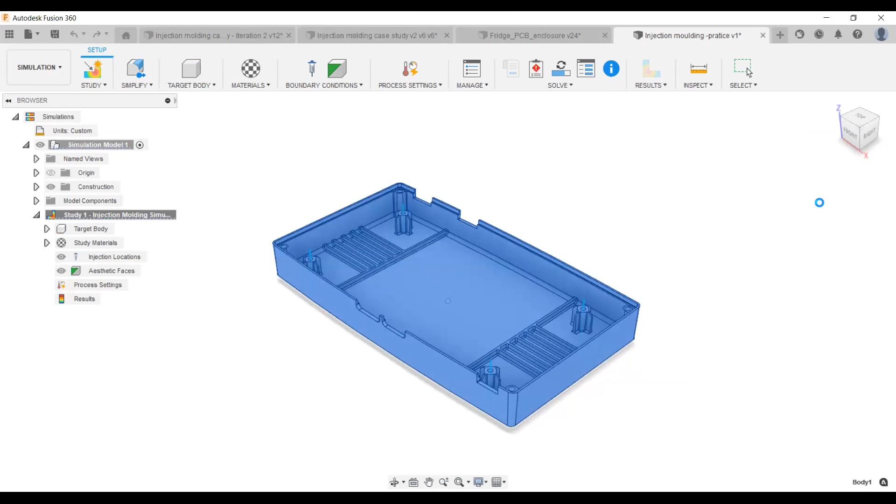So once you click on create study, the first thing you want to do, if you have multiple parts, you want to select the parts you want to actually run your injection molding on. So currently I just have one part on my screen, and I'm going to be selecting that part, and then I'll click OK, right? And so we wait for Fusion to bring up some dialog box. Right, so once I click OK, usually you will see this particular dialog box come up. So it's actually because I've done the setup previously.

So if you don't see it, very quickly you can go to setup summary, and Fusion brings up the dialog box, right? And so I'll just put this in the middle of the screen. The first thing we've done, we've selected our target body, right? The next thing we want to do is select the material that we want to use. So I'm going to click on study material, and Fusion brings up the material inside the software, right?

And so inside here we have lots. So actually we have 12,116 materials currently. So that's a whole lot. And most of the popular materials that you use for injection molding are right inside here. And you don't have to start going through all of this material to select the best material.

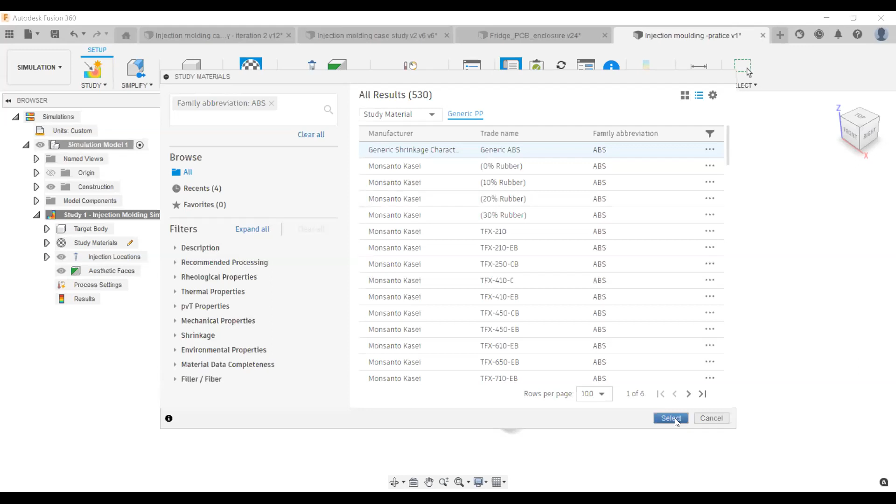If you know the material you want to use, say ABS plastic, you can just search ABS plastic. You can, from under the drop down, select the ABS plastic, the type of manufacturers you want to go with. I'm just going to go into ABS plastic like this, and I'm going to pick a generic ABS plastic, right? So generic ABS plastic. You can as well, if you know the actual ABS plastic you want to use, there are a whole bunch of them here, and I'm sure you would find the actual one you want to use, right? So I'm just going to click on select, and Fusion brings in that material into the simulation.

And now the next step is, what is the injection location? Where do we want to put the injection location? So based on the mold you probably would have created in an Inventor mold design, right? You can just click on injection location. You can select the location where you want to put it. And I'm just going to be leaving it in the center, right, for this particular case study.

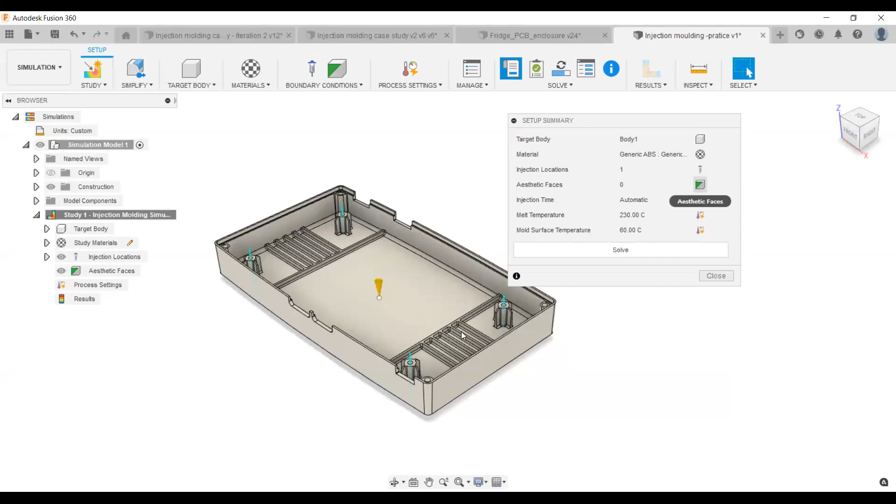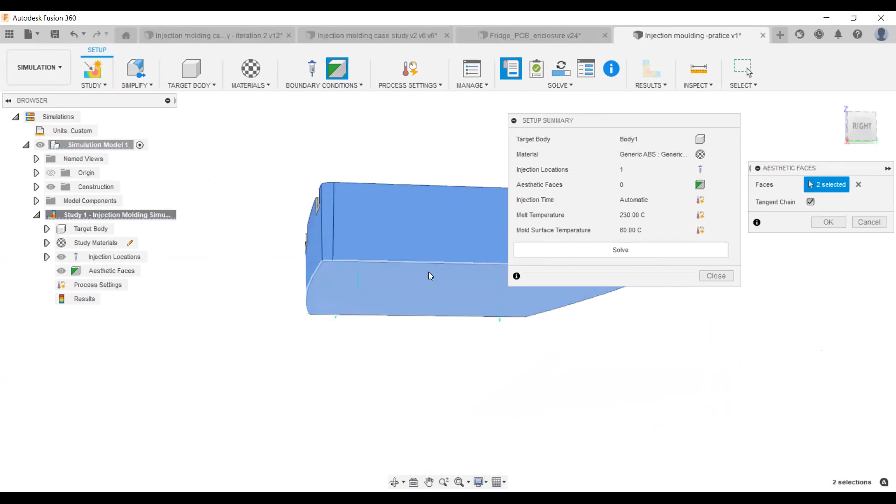Which of these faces are going to be aesthetic faces? Which of these faces is your customer going to see? I'm going to make sure I select all the faces that the customer will be interfacing with, or that the customer is going to be seeing directly, right? Because sometimes you cannot hide some kind of errors like witness marks, like some weld lines, but you want to make sure that those weld lines and witness marks are not on the aesthetic side of the product, right? So I'm going to tell Fusion that these are my aesthetic faces, and these are the places I want to come out very clean, right? And I'm going to say, okay.

The next thing it's asking us is... So automatically, after selecting your material, your injection location, and your aesthetic faces, Fusion helps you to calculate the injection time automatically, right? Or you can just click on it and you can begin to play with the melt temperature if your manufacturer is starting the design process with you. They can tell you that, okay, this is the recommended melting temperature. But what Fusion does for you is that it shows you by industry standard what the recommended melting temperature is for ABS plastic, right? You can click on specified and you can begin to change each of these settings.

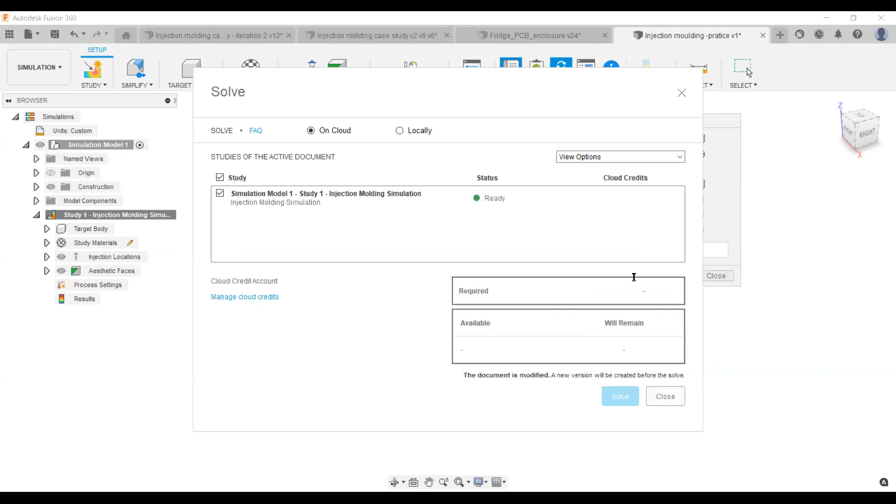So I can just click on OK. The melting temperature we've also set, right? And the mold surface temperature has also been set under here, mold surface temperature, melt temperature, and you can click on specify if you want to change some of these settings, but these settings are actually good to go from here. And then, with just a few clicks, you can then click solve. And within a matter of time, so this study takes about 15 to 30 minutes to come out.

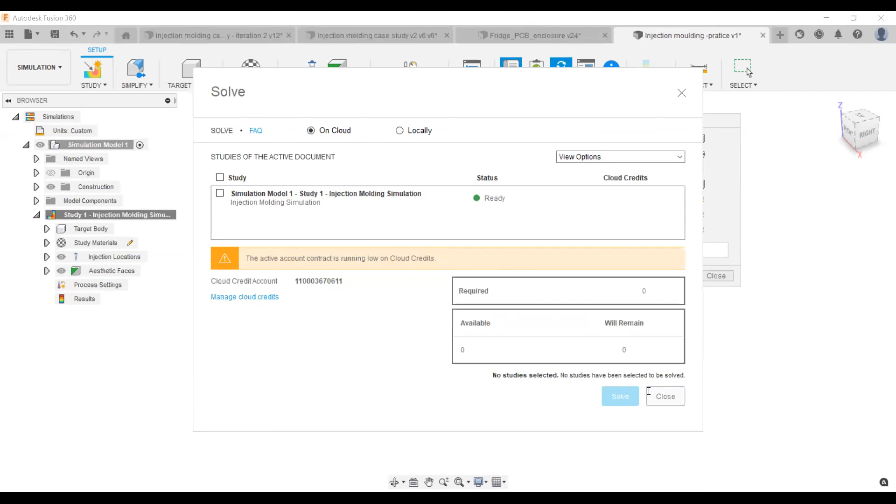And for you to send this study to the cloud, you have to pay something called cloud credit. I'm not going to be getting into all of that, right? Unfortunately, you cannot solve injection molding locally, although you can do static stress locally. But because of how intensive this study is going to be, we have to send it to the cloud to get the results, right? So this is just a quick way for you to set up your study.

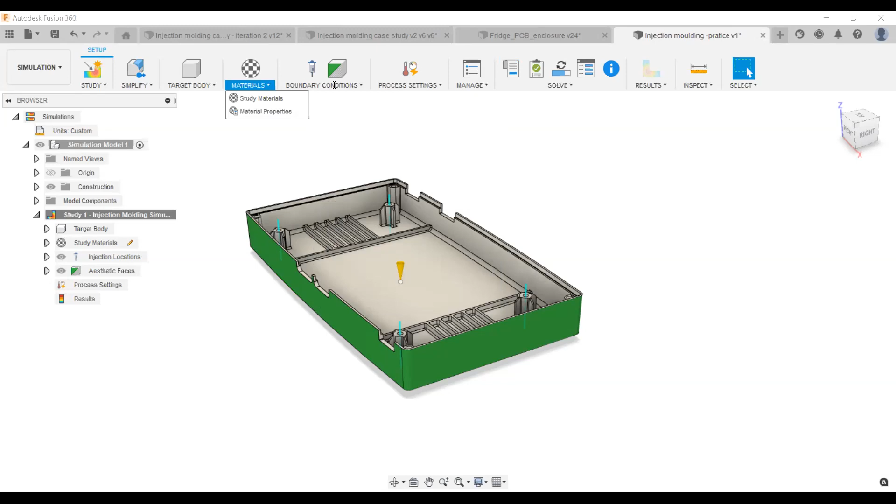If for any reason the setup summary doesn't come up, you can always go from left to right. So if you want to simplify your model, you can pick the target body here. You can select the material. Yes. Yeah. So I'm just going to leave it at that, and I'm going to open up for questions and all the rest.

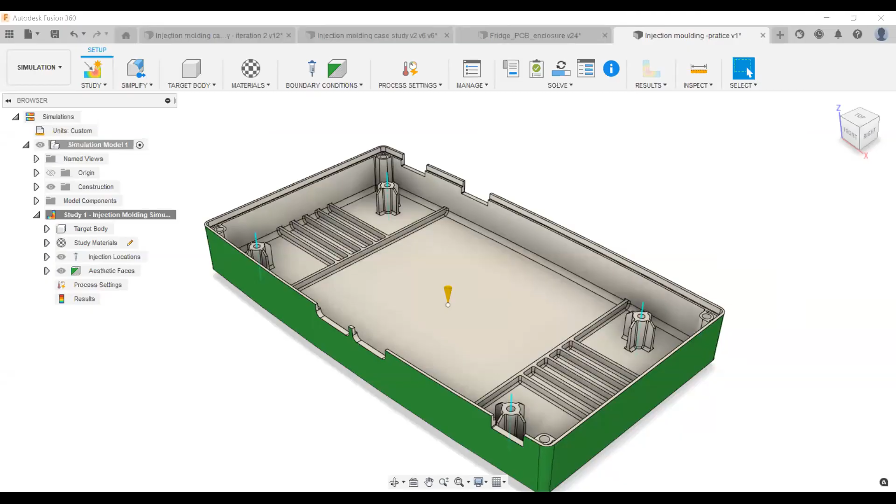Obiora, thanks so much for the wonderful presentation. You've actually answered some of my questions towards the end because I wanted to ask how the costing process for this new add-in to the software is like. I wanted to know if it's similar to generative design where you have to pay for cloud credits, or you can solve the simulation locally, like static simulation in Fusion 360.

All right. The first question I want to ask: is it possible to have a customized plastic material? For instance, you're looking for a specific material, probably polypropylene plastic material, and you don't have that material in the 12,000 list of materials we showed earlier. Is it possible to customize the material? That's the first question. Then the second question: is it possible to have symmetricity in your analysis?

What I mean by symmetricity is this: when you're doing a static structural analysis and you have a very complex part that will take a whole lot of time to run, you probably want to use your symmetric plane to divide the part into 4 or 2 different sections. Is it possible to have a similar analysis in plastic so that you refine your mesh properly and then you get a better result?